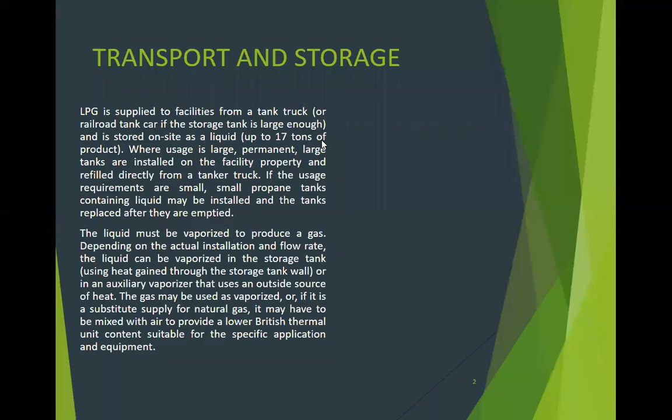Okay. The storage tank. Tanks used for the storage of propane are made of steel.

Tingnan pala, yung natural gas, so marami doon methane. Ito naman sa storage sa LPG is propane. Propane gas at LPG gas.

They can be installed either above or below grade. Although underground tanks have an advantage of more constant environment, most tanks are placed above ground because of the lower initial cost and EPA requirements.

Environmental Protection Agency. So ito yung vapor pressure of butane propane mixture. Kung kayo sa chemical engineering, ito yan. Yung table na yun, pinulugay ng masa.

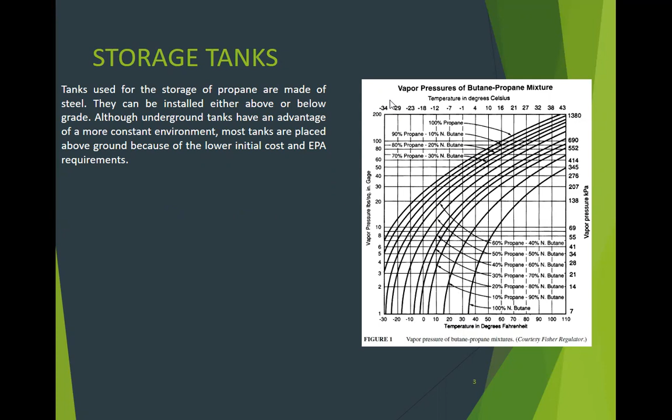Or ito yung mixture na propane, butane, then ayan, mga mixture yan. Propane, butane mixture, and then yung properties.

Because of the relatively high pressure developed by the propane vapor, all tanks must be designed in conformance with the ASME code for unfired pressure vessel. So the vapor pressure developed in an above-ground tank is based on the ambient outside air and can be found from figure 1.

So the temperature, yung mixture mo kung 100% propane, ito yung vapor pressure that is 50 psi. Malaki, di ba? Mababa siya pag may mixture ng butane.

Ang butane kasi ito, 100% butane.

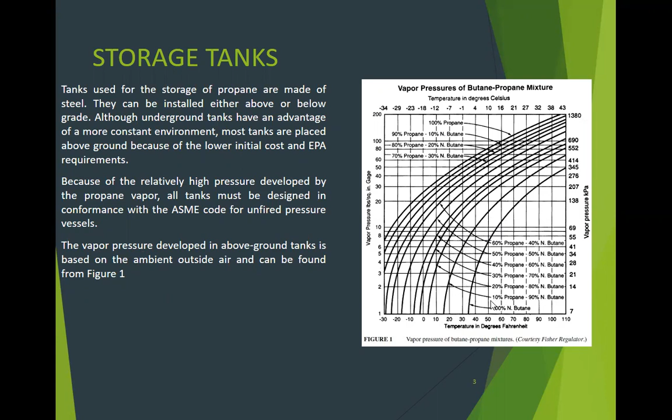So for underground tanks, a figure of 50 Fahrenheit or 10 C is used. Ito yung surface Earth. Diba yung buhangin? Pag mga underground, ano yung temperature ng buhangin? Ina-assume nyo na 50 Fahrenheit or 10 C.

So typical capacities of large standard tanks are shown in figure 2. Dito yung capacity in gallons. I mentioned like pier spacing, ito. Yan, sa tukod. So estimated weight.

May kita kayo sa mga plant sa petroleum refilling tank. LPG refilling plant natin, meron dito sa people. Makikita mo yung dito. Kaya lang yung dimension, hindi mo susunod kasi may kanya-kanya naman yung manufacturer niyan. Pero ito is a guide only.

Estimated weight, yan, para sa foundation. The dimension and capacity of a smaller standard tank are summarized in Table 1. Dimensions vary slightly from manufacturer. Itong 120 gallons, with propane capacity, yan.

Hindi pa ito yung ginagamit natin, malalaki ito. Surface, total surface, wetted surface. For non-standard tanks, Figure 3 contains a simplified method for calculating the areas of the tank with various configurations.

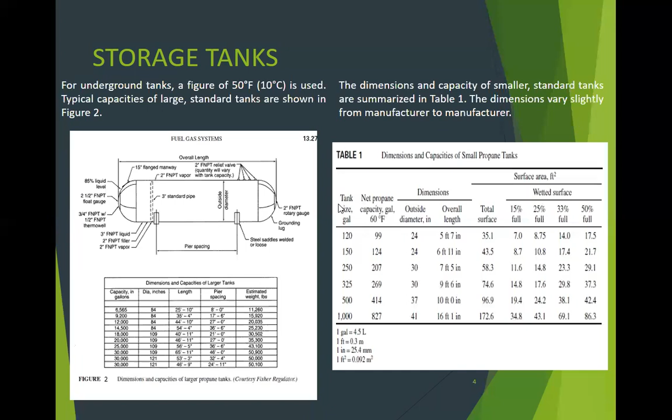Check nyo rin yung mga latest ngayon sa LPG tank. DOT cylinders range in size from 1 to 420 pounds capacity. Cylinders built in 1966 or earlier may bear the Interstate Commerce Commission ICC designation ASME tanks range in size from 500 to 60,000 gallons.

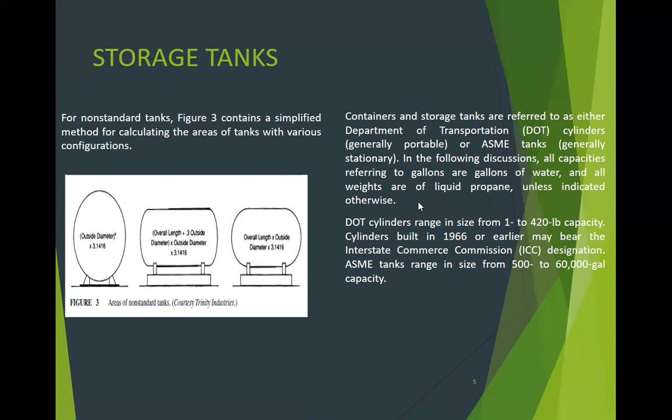The maximum content of liquid in tank, so the maximum allowable quantity of LPG permitted in a container is limited by NFPA 58 to a filling density based on table and formulas provided in that code. Check nyo naman doon.

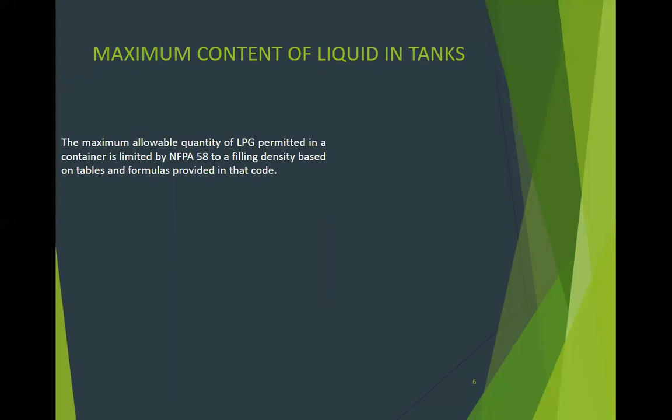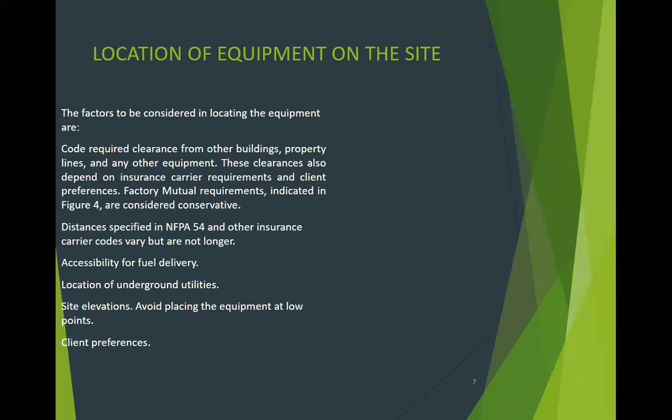So location of equipment on site. The factors to be considered in locating the equipment are: the code requires clearance from other building, property lines, and any other equipment. These clearances also depend on insurance carrier requirements and client preferences. Factory mutual requirements indicated in Figure 4 are considered conservative.

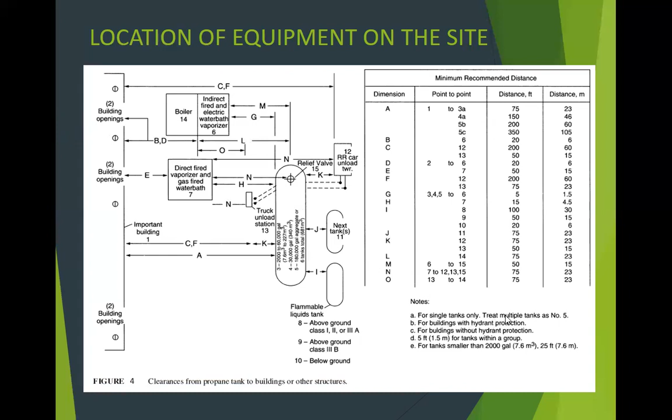Letter G, so 1, 2, 3, A. So sundan nyo na lang A. Yan mga rules.

So tank foundation and support. Yung fires, tank foundations must provide a stable means of support. Uneven settlement will lead to errors in fuel gauging and stress leading to broken lines.

The weight of tank should be calculated using water since there may be a requirement for hydro testing during the life of the system. Yung iba, nakita ko noon, nakalagay na weight is pang design sa foundation, ginamit yung talagang content, LPG. LPG ang ginamit, hindi dapat tubig, kasi mas mabigat yung tubig para sa fondasyon. Ibig sabihin, pag ginamit mo yung LPG tapos naka-test ka, lulubog yung foundation mo.

Some larger tanks may require a temporary intermediate center support during the time they are filled with water for hydrotesting. So ito, pag may hydrotest ka, so dagdagan mo ng support, kung dinesign mo sa weight ng propane and LPG.

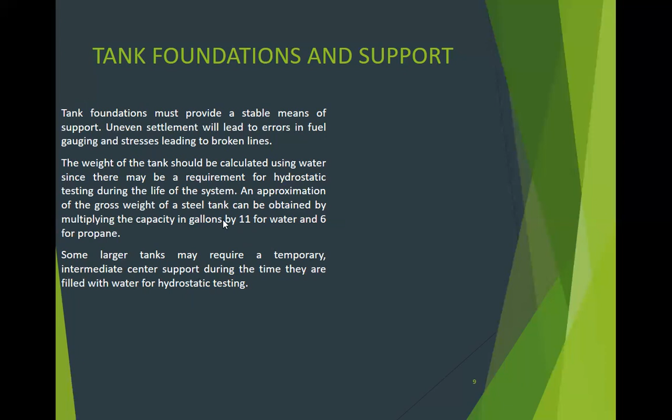Regulators, marami na nakikita nito, di ba? So the gas regulator, LPG regulator. The regulator for LPG is different from that used for natural gas service. So the purpose of an LPG regulator is to reduce a variable inlet pressure to a constant outlet pressure under variable flow conditions.

So the following information is required to size a regulator: what is the minimum, significant, and maximum flow rate possible, the maximum and minimum container pressure, required outlet pressure desired, manufacturer's rating curves for the regulator. So ito yung table 2.

Andyan regular delivery pressure, and the relief valve start to discharge pressure setting. So ito.

So the pressure developed inside the storage tank is produced by the vaporization of the product inside the storage tank. The pressure is called the vapor pressure. This figure varies depending on the ambient temperature. Figure 1 is a direct reading chart to determine the vapor pressure for various mixture of propane and butane that might be provided by supplier.

Regulators are manufactured in single and double stage model and are selected using the capacity and rating charts supplied by the manufacturer. If a relief valve is provided as part of the regulator assembly, refer to table 2 for pressure setting.

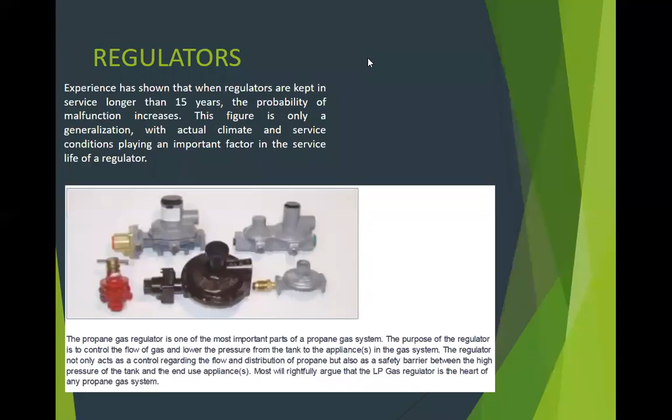Relief devices. The purpose of a pressure relief device is to automatically vent propane vapor to atmosphere upon reaching a predetermined high pressure. It can be an integral part of a pressure regulator, separately installed in the storage tank, part of vaporizers and mixers, or in the piping system itself.

The relief valve flow capacity is calculated on the basis of a full tank and the resultant vaporization of that volume of propane. For an underground tank, the capacity will be 30% of the above ground value.

Refer to Table 3 to determine the required flow of propane based on the square foot area of storage tank by use of figure 3. This one is the capacity of Table 3.

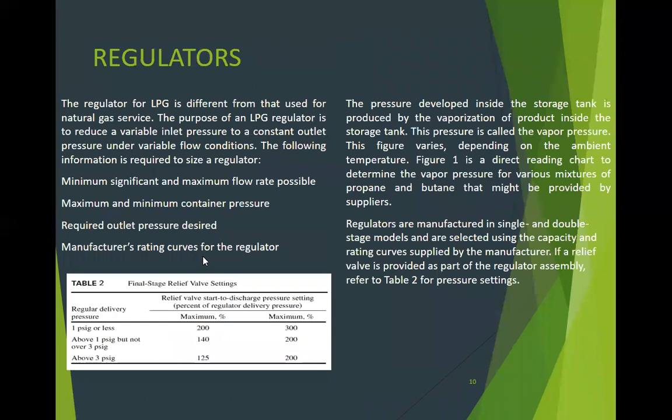Flow, CFM air. The relieving capacity, the relief valve.

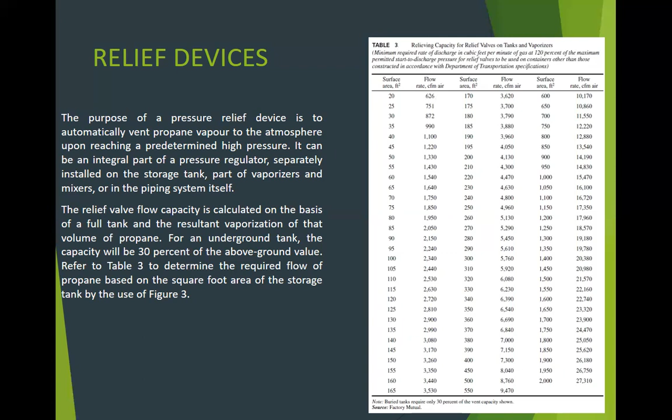Pressure relief devices. All larger tanks must have a separate relief valve installed directly on tank. If a single relief valve does not have the required flow capacity, it will be necessary to have multiple relief valve mounted on the top of the tank to provide the necessary flow rate.

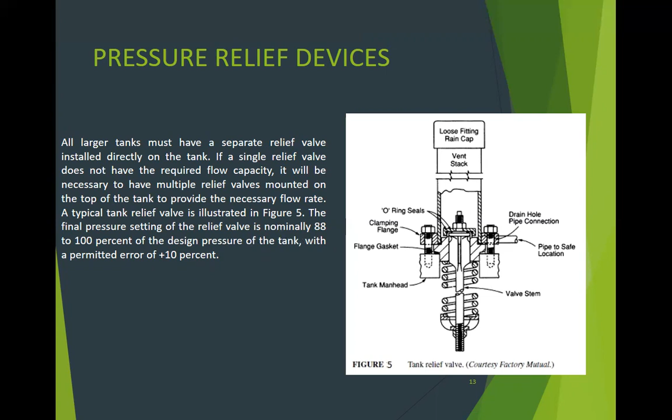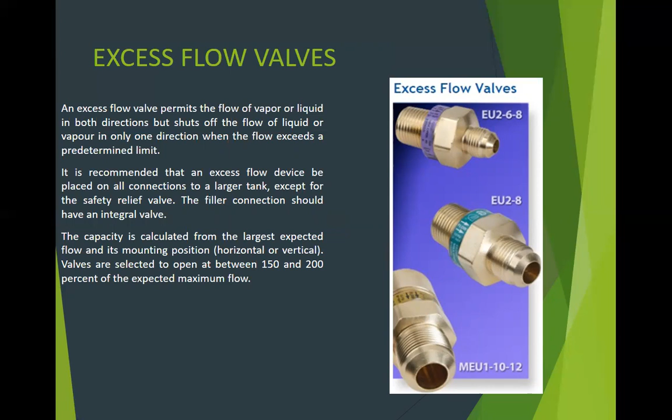Excess flow valve. An excess flow valve permits the flow of vapor or liquid in both directions but shuts off the flow of liquid or vapor in only one direction when the flow exceeds a predetermined limit. It is recommended that an excess flow device be placed on all connections to a larger tank except for the safety relief valve. The filler connection should have an integral valve. The capacity is calculated from the largest expected flow and its mounting position, horizontal or vertical. Valves are selected to open at 150 and 200% of the expected maximum flow.

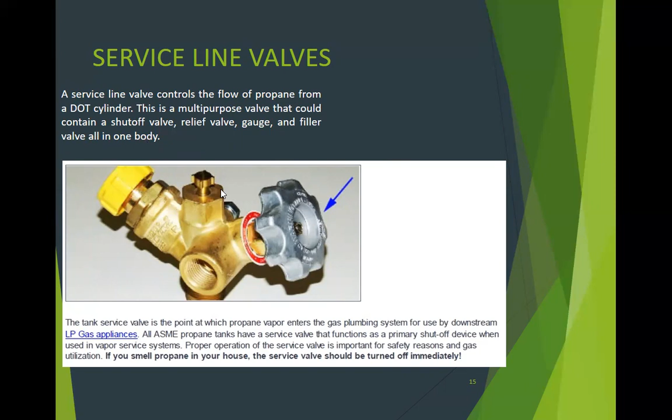Service line valve. The service line valve controls the flow of propane from a DOT cylinder. This is a multi-purpose valve that could contain a shutoff valve, relief valve, gauge, and filler valve all in one body. There are a lot of them.

Filler valve, used for filling. A filler valve permits the flow of liquid in one direction only. It is used for filling larger tanks with liquid. This valve contains an integral back pressure check valve that will prevent the loss of vapor or liquid from the tank if the fill hose or fitting ruptures. A preferred location is at the filling connection used by the delivery truck hose.

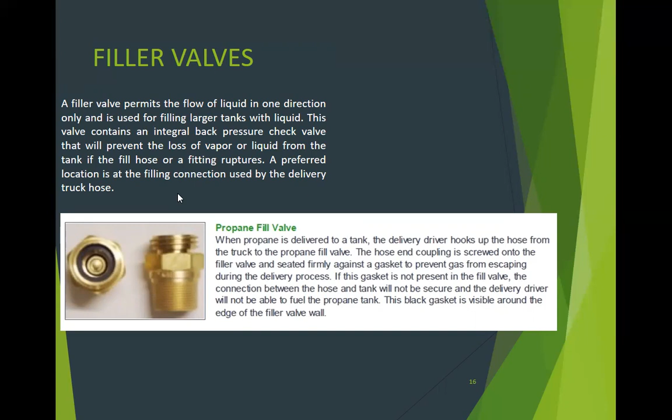Vapor equalizing valve. When large tanks are filled, the liquid propane added to the storage tank compresses the vapor in the tank. A vapor equalizing line is connected between the vapor area of the receiving tank and the vapor area of the delivery truck during propane deliveries, to equalize pressure in both containers and to lessen the head requirement of the supply pump. The vapor equalizing valve is mounted in the equalizing tank truck hose connection. It permits the flow of vapor both ways. This is a sample.

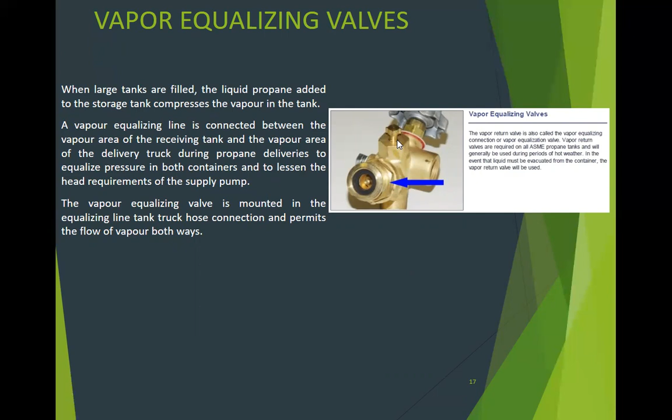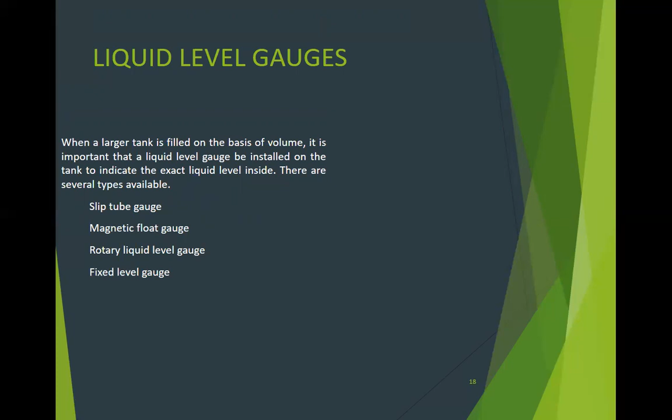Liquid level gauges. When a larger tank is filled on the basis of volume, it is important that the liquid level gauge be installed on the tank to indicate the exact liquid inside. There are several types available: the slip tube gauge, magnetic float gauge, rotary liquid level gauge, fixed level gauge. This is the subject of instrumentation.

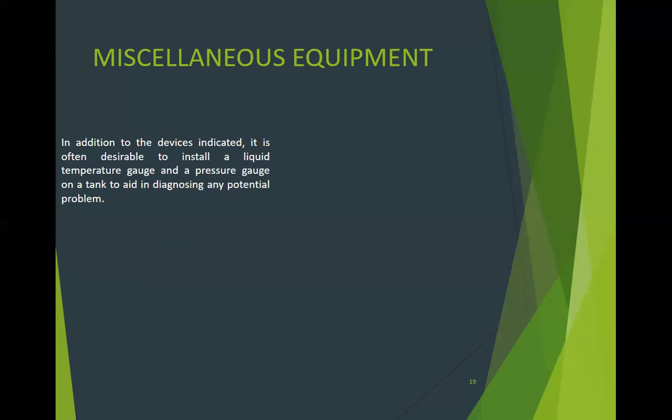Miscellaneous equipment. In addition to the devices indicated, it is often desirable to install a liquid temperature gauge and pressure gauge on a tank to aid in diagnosing any potential problem.

So next, vaporizer. Ito yung parang pump. Nag-increase ng pressure. Ito naman is para mag-vapor. A vaporizer is a device that

converts liquid propane into vapor in larger quantities than would be possible from ambient heat alone. It is required when sufficient quantities of liquid propane inside the storage tank cannot be vaporized quickly enough to satisfy the maximum demand. So there are two basic types of vaporizer, direct fired or indirect fired.

The direct fired vaporizer uses the propane itself as fuel for the direct flame. It has the lowest initial cost and no ancillary power requirement. Its disadvantages include the problem of pilot light extinguishment in high wind, production of sludge in the propane being vaporized, and a useful life expectancy of only 5 years. Optional accessories to be considered would be an automatic ignition, manual drain, liquid strainer, and propane air mixer.

An indirect type of vaporizer is available that uses steam, glycol-water bath, or the lesser used electric resistance heater as a heat source.

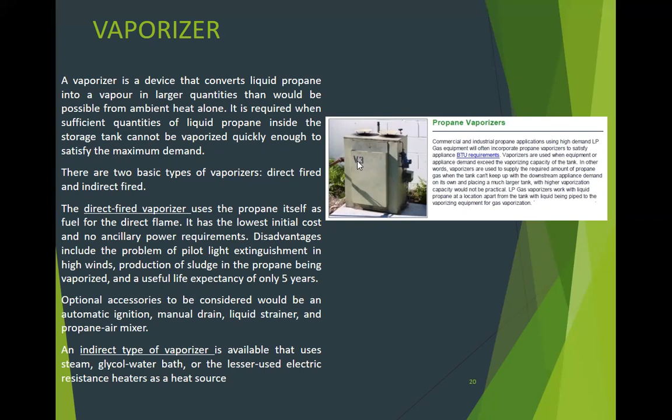So ito yung sample ng propane vaporizer. Propane mixer, ayan. Yung mga nozzle dyan kasi yung air and propane, mag-mix siya. Papasok yung air, yung propane dyan sa maglabas ng mixture.

A mixer, also called blender or proportioner, is a device used to combine propane and air together into a mixture of both gases. It is required when propane will be used as a direct substitute for natural gas because the much higher British thermal unit content of 100% propane will not allow the use of the same burner or orifice and gas train as natural gas.

Experience has shown that a mixed gas of 1450 BTU per cubic foot with a specific gravity of 1.3 provides the best burning characteristic. Refer to table 4 for properties of various mixtures of propane and air.

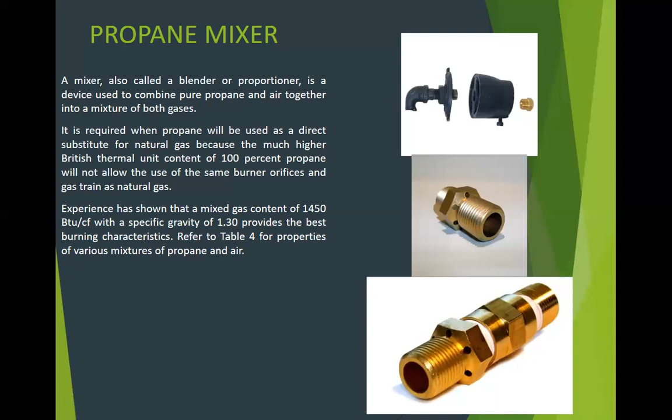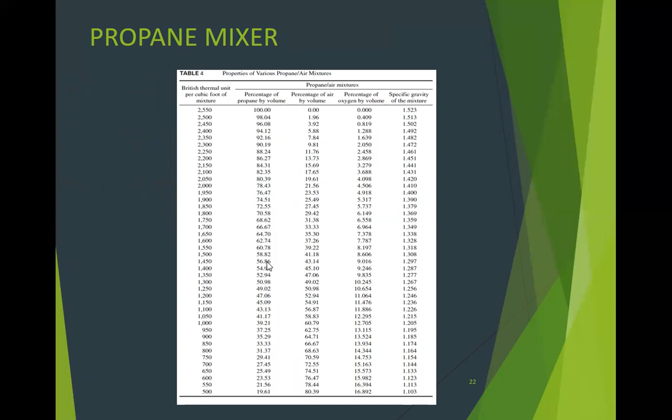So LPG system design. Dito na tayo sa size. Introduce na yung mga parts. Prior to sizing component, initially decide what equipment such as pump or vaporizer may be required and if the tank is to be above or below ground.

Select the proposed location of the tank and other required equipment on site. Determine if the propane system will be in constant use or used only periodically, such as for emergency operation or as an occasional substitute for interrupted natural gas.

Calculate the maximum hourly and daily fuel gas demand and determine if this demand is continuous, such as for a process used all day, or intermittent, such as that used for heating purposes. If only a small part of the demand is continuous, the entire load should be considered continuous.

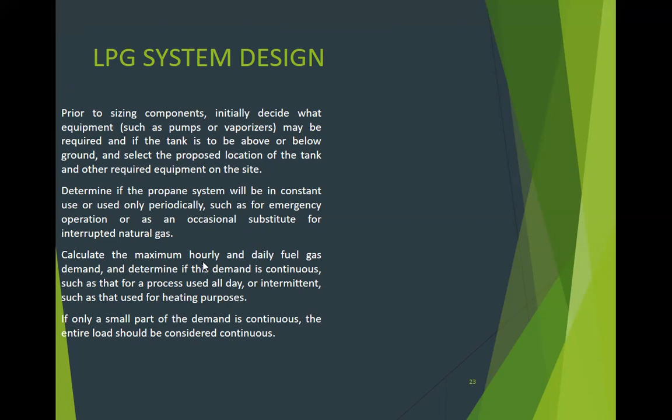The storage tank's sizing and selection. The storage tank volume is based on one of two factors: a reasonable return schedule for the local supplier, or the amount of liquid propane that has to be vaporized by the ambient air in order to satisfy the maximum demand.

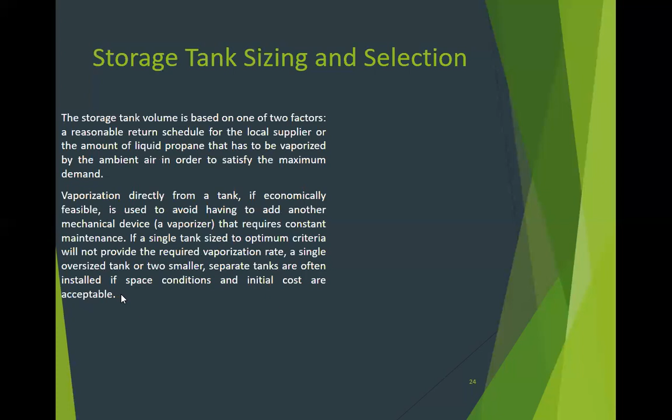Vaporization directly from the tank, if economically feasible, is used to avoid having to add another mechanical device like a vaporizer that requires constant maintenance. If a single tank sized to optimum criteria will not provide the required vaporization rate, a single oversized tank or two smaller separate tanks are often installed if space conditions and initial costs are acceptable, instead of vaporizing.

Tank based on return schedule. Using the return schedule, a preliminary starting point for determining the adequate capacity is a 10-day usable supply for continuous demand and a 3 to 5 day usable supply for intermittent or standby purposes. Ganito, yung rate mo, i-multiply mo sa 10 days, so makukuha mo na yung size ng tanke.

With the maximum propane level based on the maximum quantity or the allowed filling density, and the minimum level between 10 to 15% of the capacity, the usable tank capacity is about 75% of the total tank capacity.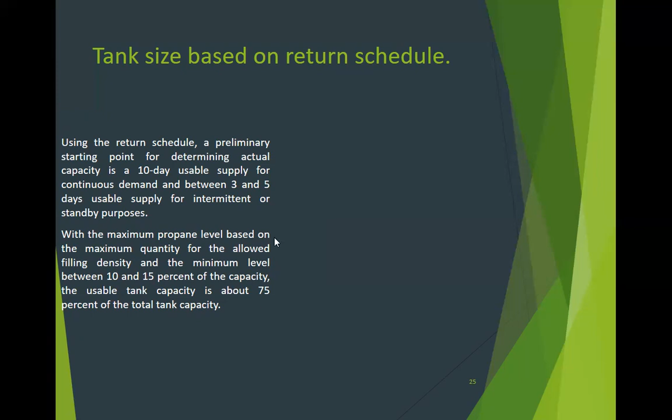So yan. Kung ano yung na-compute mo, i-divide mo ng 0.75, yun na yung tank capacity mo. 10 days, divide mo ng 0.75.

Tank size based on vaporization rate of propane. When using the vaporization rate as the critical factor in selecting the size of the storage tank, the tank must be large enough to vaporize the maximum flow rate of propane required by the facility when the outside air temperature and liquid level are at their lowest. For above ground tanks, the rate of vaporization is calculated using the wetted area of the liquid propane in the tank. For underground tank, the entire area of the tank is used even if the tank is partially full.

So there are two methods that will be discussed. The first and most accurate will use various formulas to calculate the wetted area of the tank that will vaporize the required amount of propane. The second, although slightly less accurate, is the direct reading of the vaporization rate from prepared charts. This is a more conservative method and by far easier.

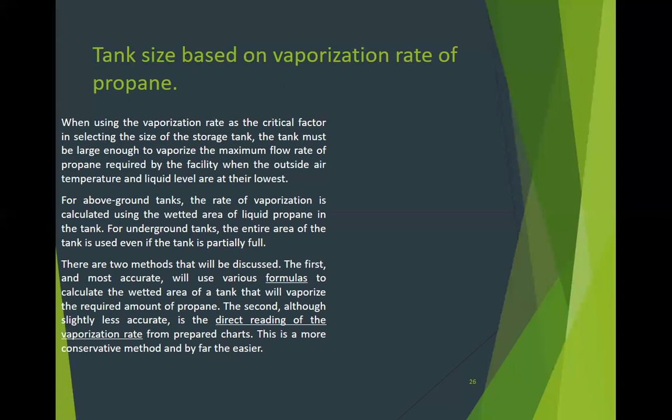Formula method muna. Using the method, the wetted area of the proposed above ground tank necessary to vaporize the required amount of propane will be calculated. If an underground tank is proposed, the calculated area shall be that of the entire tank. So the basic formula are as follows.

So the total heat is equal to the total heat of vaporization: from above ground is Q equals U A TD. For below ground tank, it's U A times 15.

To transpose to find the wetted area, A is equal to Q over U times TD or 15. And the actual amount of propane vaporized is V equals Q over L, where Q is the total amount of heat required to vaporize that quantity of liquid propane.

U is the rate of heat transfer through the wall of a steel tank per square foot of wetted area, where temperature differs in Fahrenheit. Generally accepted figures are 2 for above ground and 0.5 for underground.

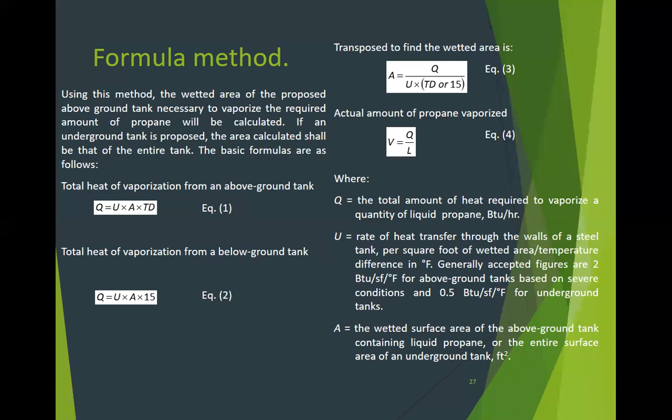A is equal to the wetted surface area of the above ground tank containing liquid propane, or the entire surface area of underground. TD is the intended difference in temperature between the ambient outside air reached during the coldest part of the day and the temperature of propane in the tank reached during the warmest part of the day, in Fahrenheit.

One factor that must be taken into consideration is the formation of frost on the outside of the storage tank. Since frost acts as an insulation, its formation must be avoided. Table 5 gives the minimum temperature difference to avoid frost formation. When predicted conditions are outside the figures required to enter the table, use the true temperature difference.

So 15 is 15 Fahrenheit, which is the generally accepted temperature difference for underground tank.

V is the propane vaporized under design conditions, in gallons per hour. L is the latent heat of vaporization of propane, BTU per gallon. This is the amount of heat required to change liquid propane to vapor, sa table 6. Interpolate to find intermediate values when necessary.

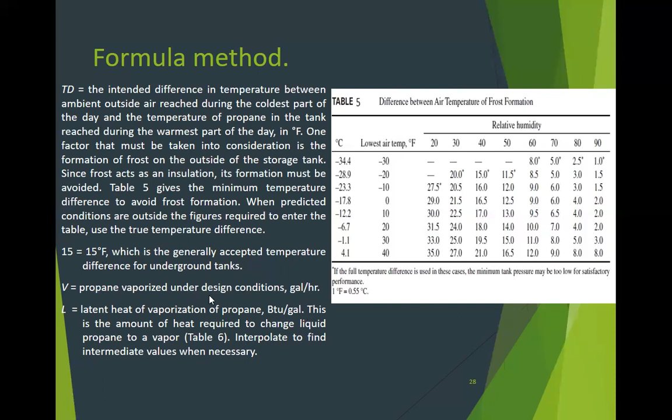Ayan, table 6. When the temperature mo, meron siyang BTU per gallon.

So the following methodology is used to select a tank with propane vaporization rate as criteria, solving for equation 3. Step 1, establish the lowest predicted ambient air temperature, highest predicted relative humidity, and required propane gas demand in BTU per hour.

Number 2, convert the British thermal unit per hour demand into gallons per hour, using table 7. Tapos natin table 7. Ayun. Ito.

So transpose equation 4 to find Q. Refer to table 6 to find L. Then substitute all figures in equation 3 and solve for wetted area.

After calculating the minimum area, consult manufacturer's catalog for size required, providing that figure with minimum level of propane in the storage tank. Select a standard tank with a slightly greater volume than that calculated.

If a single tank selected for adequate vaporization results in a size that is impractical, two tanks can be used. If the tanks are still too large or have too high an initial cost, the only solution is to provide a vaporizer.

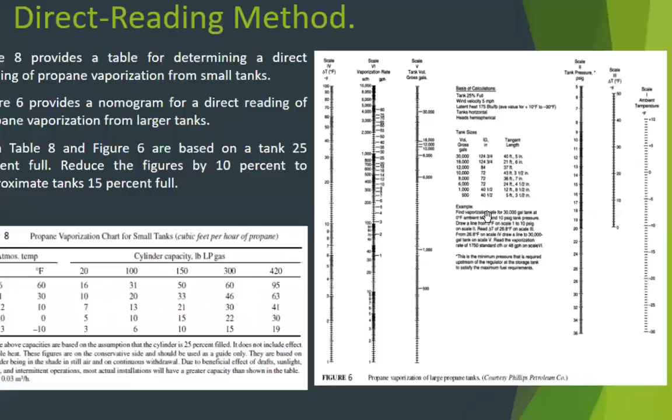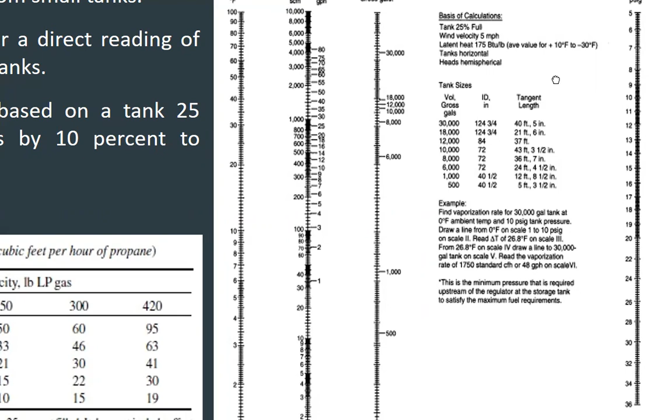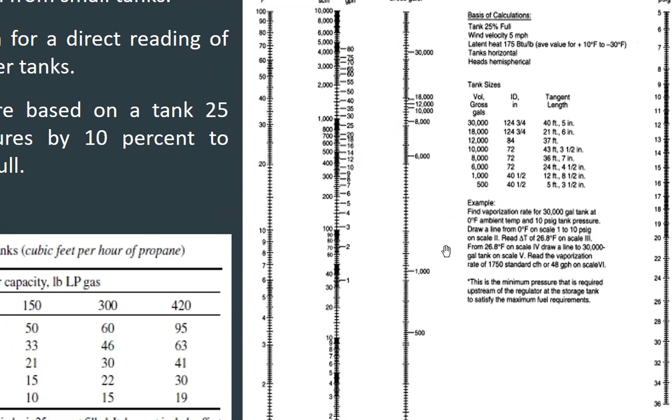Find vaporization rate for 30,000 gallons tank at 0 degrees ambient temperature and 10 psi gauge tank pressure. So draw a line from 0 on scale 1 to psi.

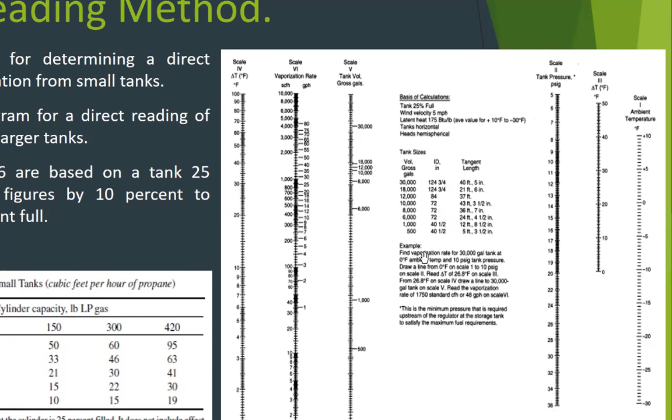Nomogram: this is the minimum pressure that is required upstream of the regulator at the storage tank to satisfy the maximum fuel requirement, indicated by the asterisk.

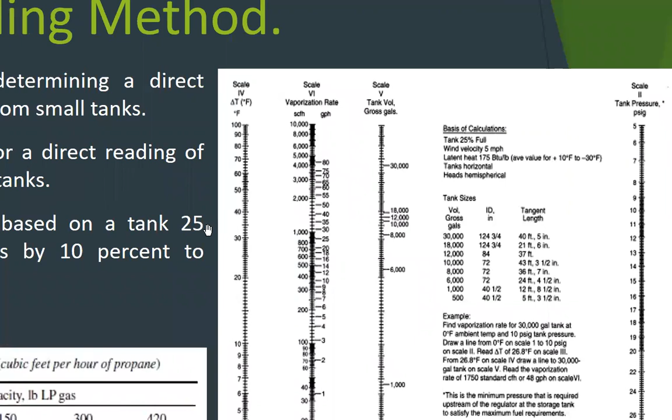Okay, so next, LPG gas pipe sizing method. A widely used pipe sizing method for low pressure 100% propane gas systems relies on the tables used for NG in NFPA 54, such as that appearing in table 9. Proprietary charts are available that are less conservative and more accurate.

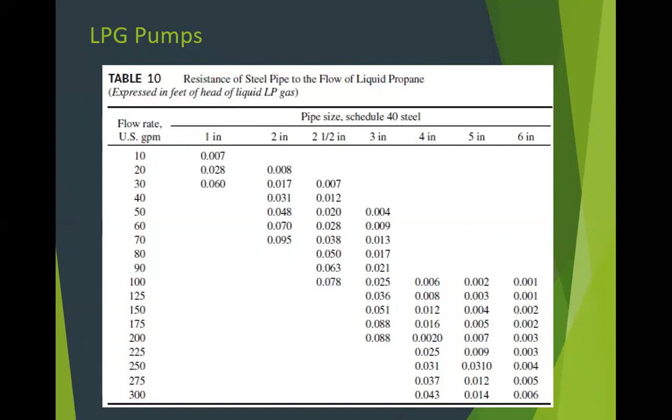2. The friction loss of the liquid in the piping network. Refer to table 10 for the friction loss of liquid propane through steel piping. Table 11 provides the losses for fittings in equivalent feet of steel pipe. So this is the resistance, the friction of LPG in the pipe, and for the fittings, this is it. This is the path the LPG follows.

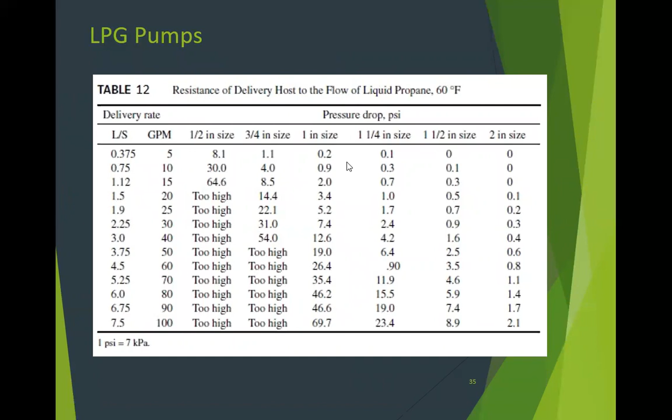Now the data is complete. For other fittings, refer to the manufacturer. 5. Static head difference between the supply and the setting point, meaning the elevation, and the resistance to flow from meters, filler valves, and so on. Obtain this information from the manufacturers.

6. Add all pressures obtained from steps 1 to 5, and add 10% for additional pressure available. This figure is the total head requirement for the pump. The flow rate is determined from the specific application. The piping materials are the same as the LPG system.

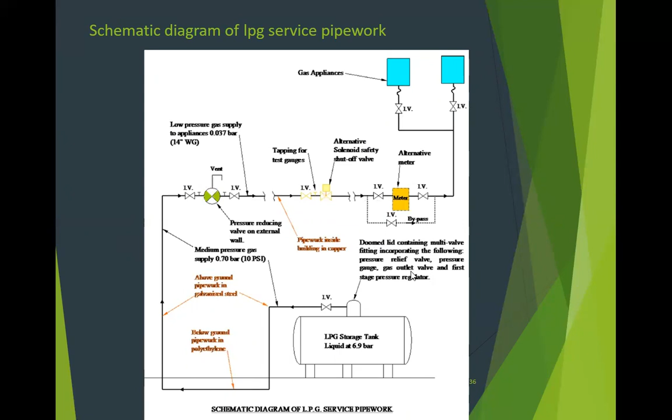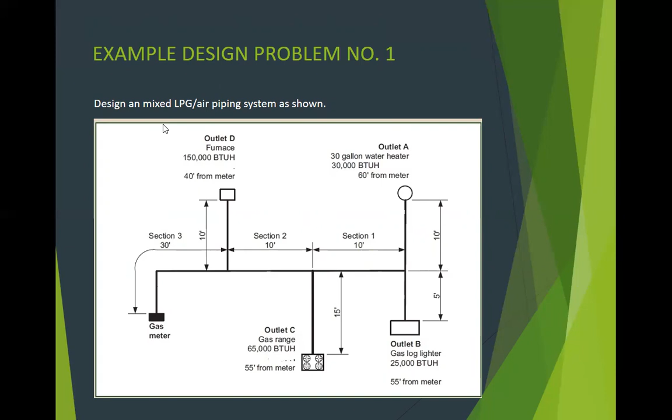So for example, design problem number 1: design a mixed LPG air system as shown. It's the same as our previous sample, but here it's a mix of LPG and air. Given the piping system of LPG air pipe sizes.

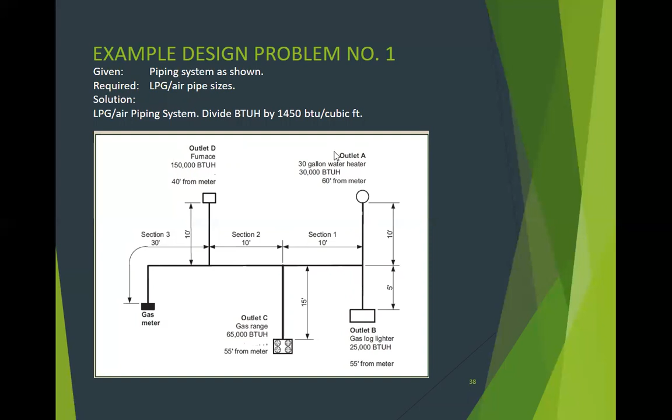For the LPG mixture with air, we use 1450 BTU per cubic foot. So for a rating of 30,000 BTU per hour, you divide by 1450 to get the cubic feet per hour. Okay, let's discuss these lengths.

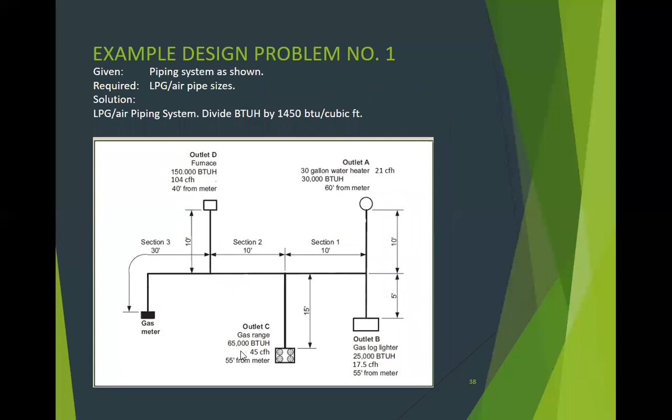Then divide the CFH for LPG/air mixture by 0.69 to get the equivalent natural gas piping system. So 21 divided by 0.69 becomes 30. This one, 17.5 divided by 0.69 becomes 25. Next, 45 divided by 0.69 becomes 65. And 104 divided by 0.69 becomes 150.

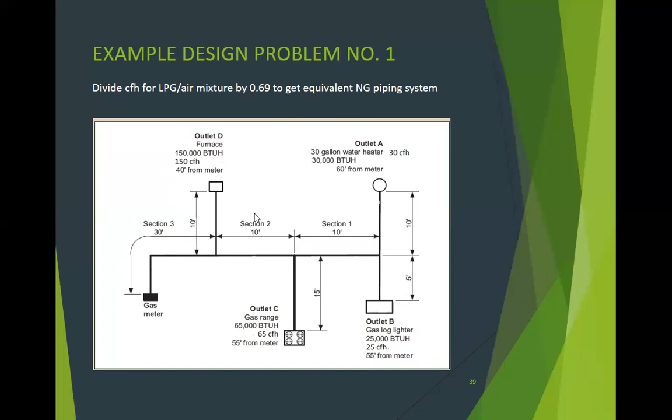Notice it's similar to the original 30,000 becoming 30, right? So this is now the equivalent. Then use table 9, low pressure gas piping, with scheduled gas pressure of 0.5 PSI gauge, pressure drop of 0.3 inch water column, based on 0.6 specific gas gravity.

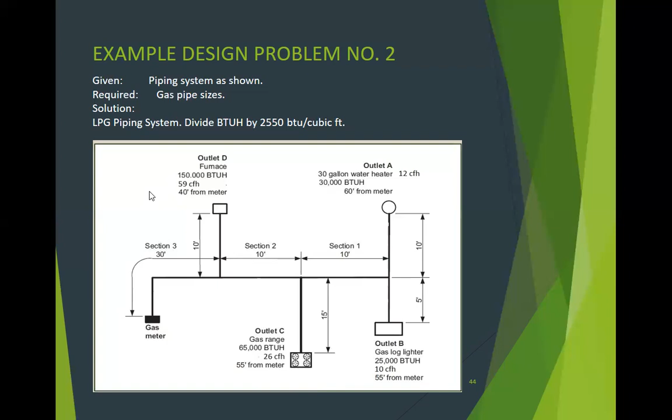So, divide the CFH for LPG by 0.63 to get the equivalent natural gas. Outlet A: 12 divided by 0.63 is 19. This one: 10 divided by 0.63 is 16. This one: 26 divided by 0.63 is 42. This one: 59 divided by 0.63 is 94. So this is the value you will use in the table.

Go to table 9, low pressure gas piping schedule. Gas pressure, 0.5 PSI gauge. Pressure drop is 0.3 inch water column, based on 0.6 specific gravity, as given in the table.

Step 1: to determine the gas input for each appliance, use the table or nameplate on the appliance - already given. Number 2: determine the length of pipe from the gas meter to its outlet. If the length falls between listed lengths, you should go to the next one. So the length falls between 50 and 60 - you got 55, so that's between lengths 50 and 60, so go with 60.

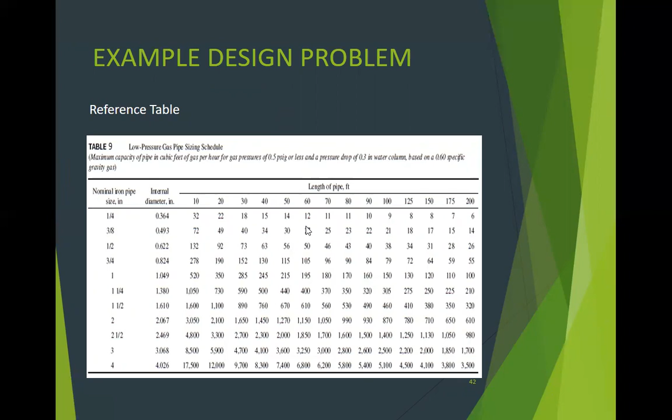This one at 42 CFH, 60 feet, 42 - go one size up since it exceeds 27. Use 40 feet column demand load, 94 CFH at 40 feet - so that is 3/4.

Okay, figure the size of the main pipe feeding more than one appliance. Go to the most remote outlet, 60 feet from the meter, so use 60 feet. Even if this is 55, still use 60 feet. Determine various pipe sizes based on demand load for each section.

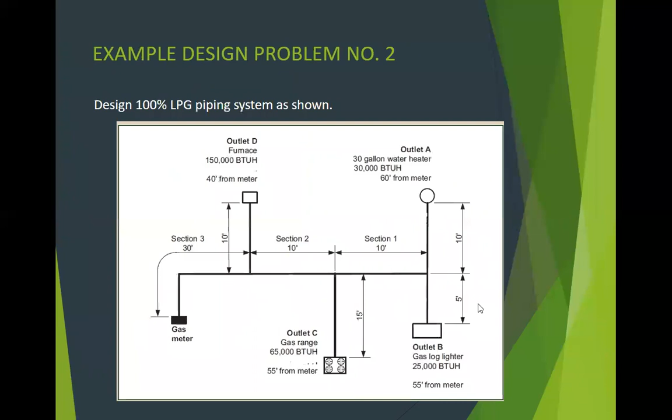Same thing here in section 2, 77, so the pipe size is 3/4. For all outlets, 171 CFH, minimum pipe size is 1 inch.